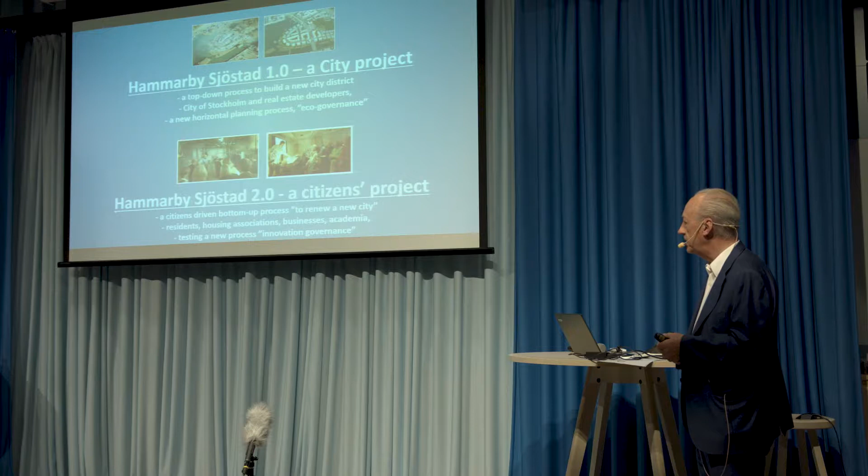Hammarby Sjöstad 2.0 is a citizens project, citizen-driven bottom-up project to renew a new city. Residents, housing associations, businesses, academia, all are on board in this platform. And we are testing a new process, innovation governance.

So here is 1.0 from 1996 to 2016. It was the picture to the left, a rundown industrial area, really brownfield. Then Stockholm tried to get the Olympic Games 2004, and the plan was to have the stadium and the Olympic Village on the place where Hammarby Sjöstad was built. Now, happily, Athens took the games, and we could build a new city, and you have the picture to the right. That led to Stockholm becoming the first green capital in Europe in 2010.

The Economist has branded this one of the world's highest profile examples of sustainable city development. We are pleased to read that, but we understand that there is much more to do.

So this is the backbone of Hammarby Sjöstad 1.0. It's the management of waste, recycling of waste to energy. It's a vacuum-based system, underground, clean, reliable, no landfill. Everything goes down underground, and it goes to produce gas or district heating. This serves as a demo site for city development in China, UK, Norway, Dubai, for example.

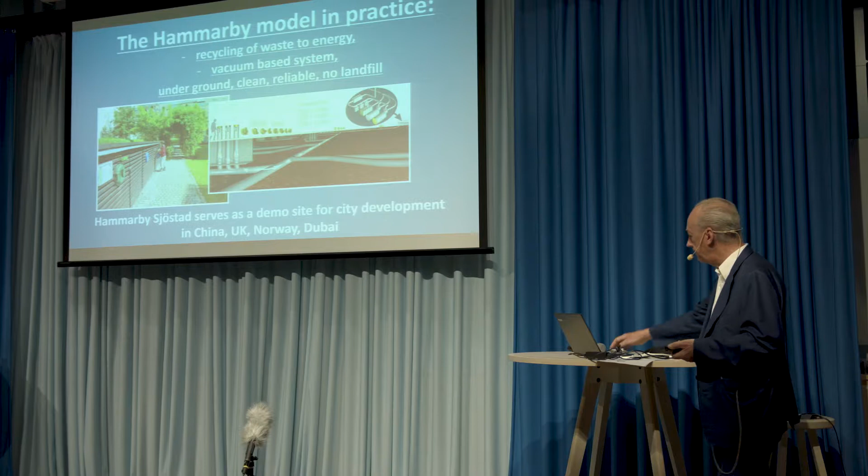On transport, the goal was 80% of commuting between home and workplace should go either by public transport, bicycling, or walking. That is reached. We have a lot of cars, but we are not using them for commuting.

Still under construction, new state-of-the-art buildings as regards energy and climate standards. To the left is a new area, now almost finished. In the middle, under construction, a new office area, and then to the right, a new residential area.

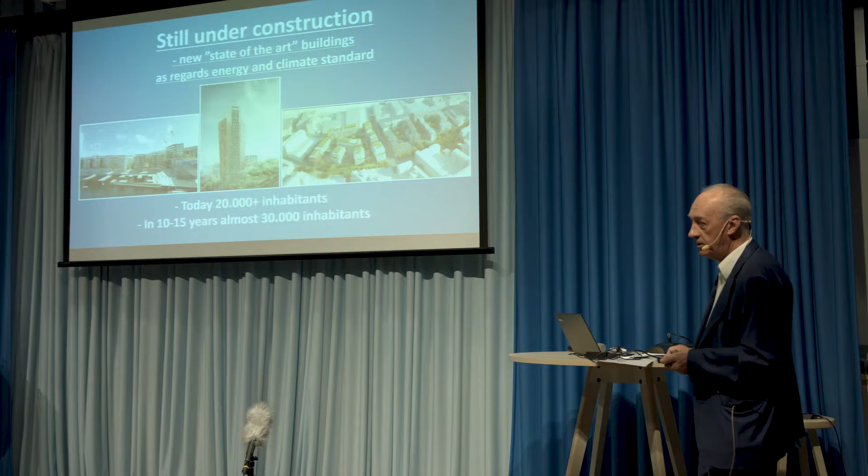Today, we are 20,000 people living here. In 10, 15 years, almost 30,000. Now, all visitors from abroad, not least from China. China are building Hammarby cities, and they are learning very much from that.

And they have one question: what is the secret behind the success? And they think it's technology. We say, no, it's not technology. It's other things. Policy, a high ambition from the beginning, the policy declaration from the mayor of Stockholm: I would like to see a city that is twice as good as anything built before. That was the key to do this.

Second, the planning, a new concept for city development called eco-governance. Instead of splitting up land to each developer, you force the developer to sit around the table together with the city authorities and plan it so that you have an agreed sustainability plan for the city. Not until that is done are you allowed to start splitting land and building on it. So that is the key to it. And we tell the Chinese visitors, if there's anything you should remember from this visit, it's the word eco-governance.

Without that, you don't do it. With that, you can get a lot of things done.

And then management, a new resource management system, to reduce, reuse, and recycle energy, water, and waste. It's called the Hammarby model. It's well known and used internationally.

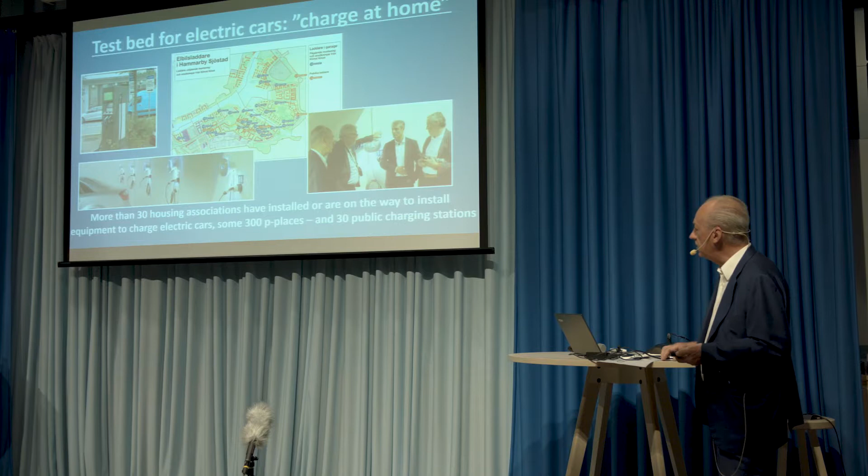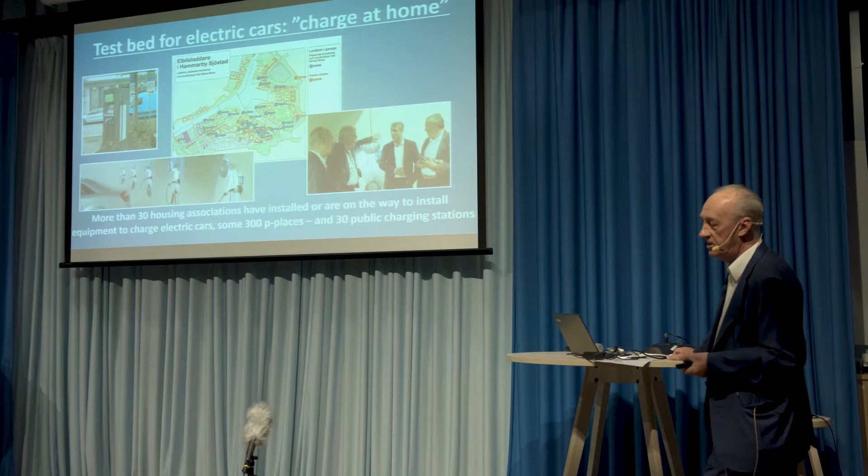So this is one example: test bed for electric cars, charge at home. There are charging stations in the city, in the streets, but that is not the key. The key is that you need to be able to charge your car in the garage at home during nighttime.

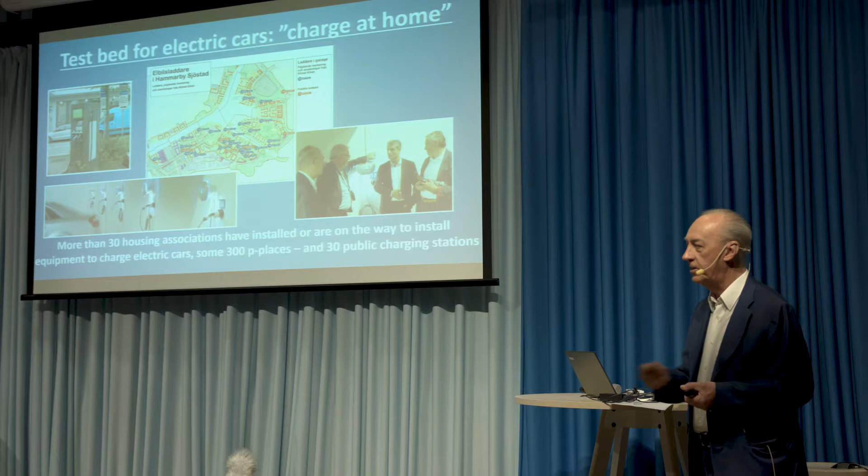Everything is available for a quick transformation of our fleets into electric cars. The cars are available, energy is available, charge equipment is available. But there's one simple thing missing: the charge equipment is not on the wall in front of my car. And as long as there's nothing in that wall for me, I'm reluctant to change to an electric car. But as soon as it's there, I start to think about when and what sort of car.

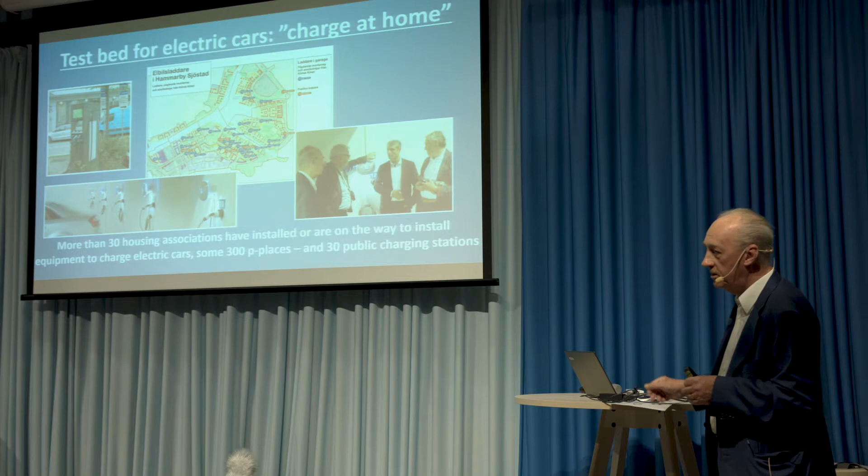And you take the picture to the left down there. This is how it looks in our garage. This is where I have my car, and I'm now discussing with my wife what sort of car we are going to buy instead. The Energy Minister was looking at it.

But the map in the middle, you see the blue marks, that's the housing associations that are already engaged in this and installing it. So we have more than 300 parking places now equipped. There will be 500 by the end of the year, and 1,000 by 2020. And we have reached the critical point of 20%.

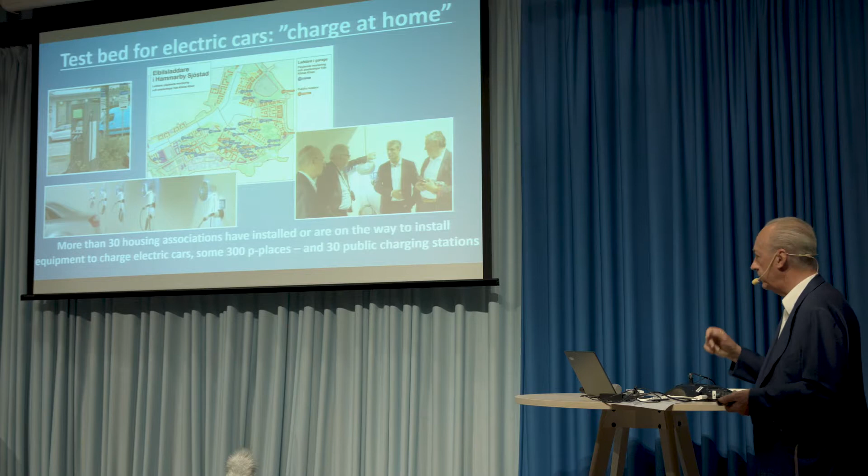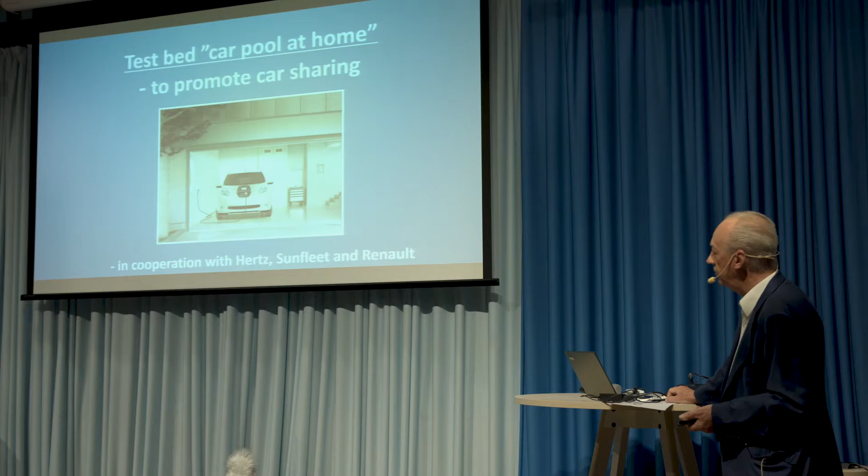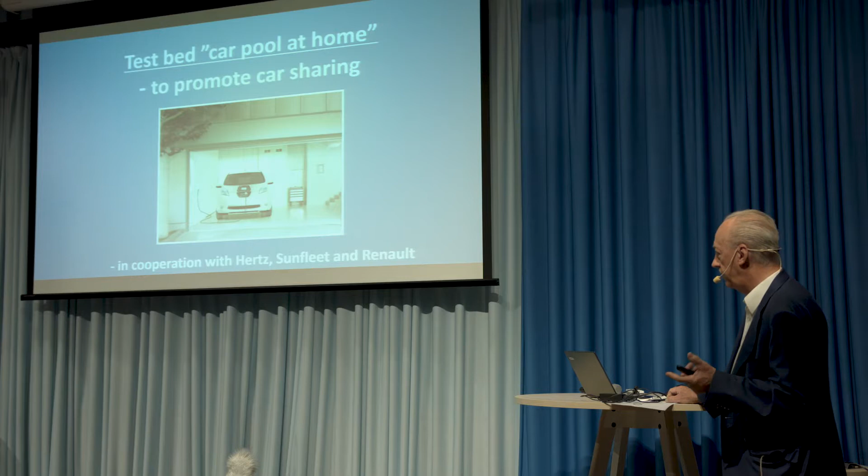So this is a new initiative together with Hertz, Sunfleet, and Renault. That's about carpool at home, electric carpool at home. Instead of finding a car on the street, we have a lot of carpools in our city district, but this is to bring it into the garage. So I take the elevator down, I find the car, I share that with 2 or 3 other families. And that will reduce cost for using the car, and will speed up the introduction of electric cars.

Here's another: we have a coordinated procurement of transport for recycling and other real estate services. We go together, about 50 housing associations working together, doing this procurement together. We can save money, and we also set the condition that you have to use electric cars instead of traditional cars. So these big cars to the right will be replaced by new ones, and we know now that both Scania and Volvo are on the market with it, and we are trying to get that in.

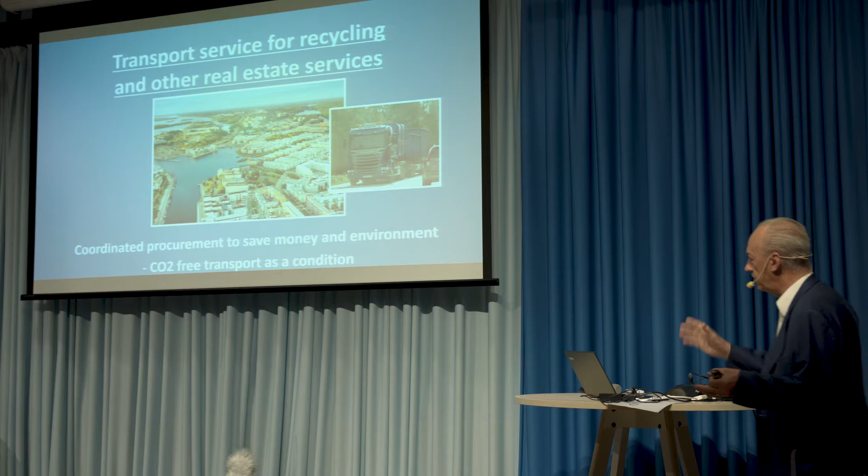So CO2-free transport as a condition. We are working with Taxi Stockholm, and there is a zero zone taxi program, so when you register on zero zone and you phone for a taxi, the call goes out to the electric cars first. That gives an advantage to those taxi drivers with electric cars. And we are supporting that so that they can reach the goal for 2025, when all taxi cars will be electric.

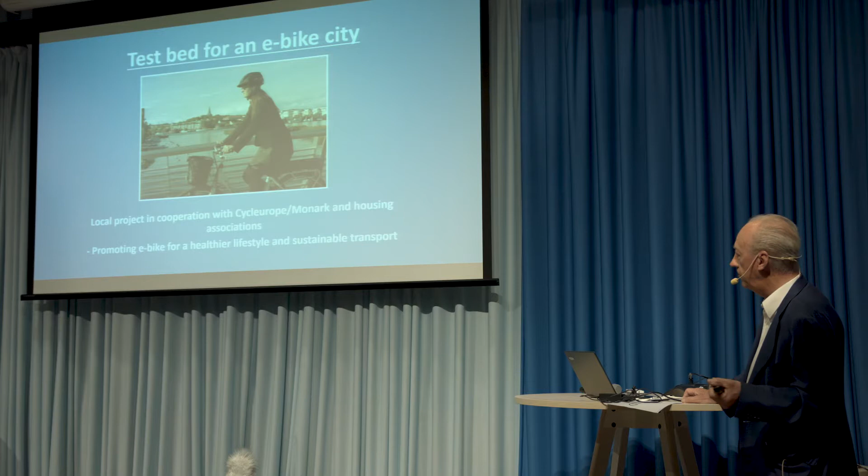We test bed for e-bike city, and we are working with housing associations to introduce electric bicycles to go from cars and from public transport into something that is a healthier lifestyle and sustainable transport.

We are working with leading companies in Sweden, including Vattenfall, on Bus Plan Stockholm, a test bed for electrification of inner city buses. We started with a demo line, and we are now pushing for a complete change from traditional buses into electric buses. We have Volvo, Scania, Vattenfall, ABB, Siemens, Ericsson, and others on board. The Stockholm region is a bit slow on this, but we hope we'll take a decision next year.

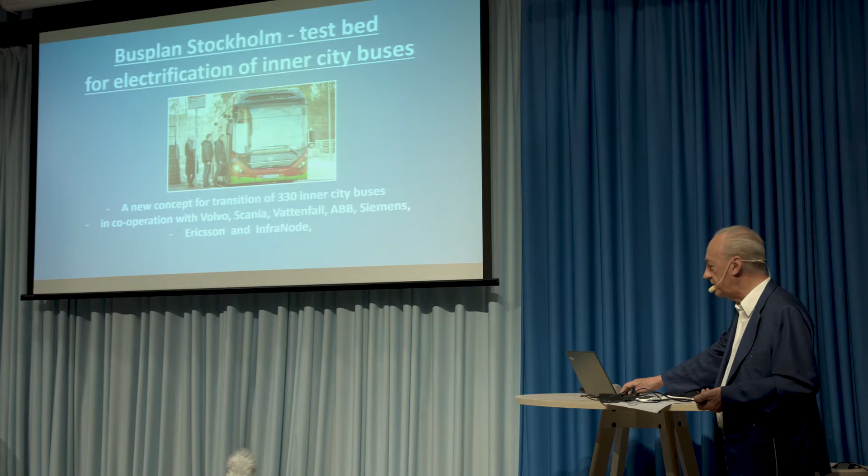Now we are also working on transport—that was about charging at home. This is about the use of energy in our buildings, so we call it energy at home.

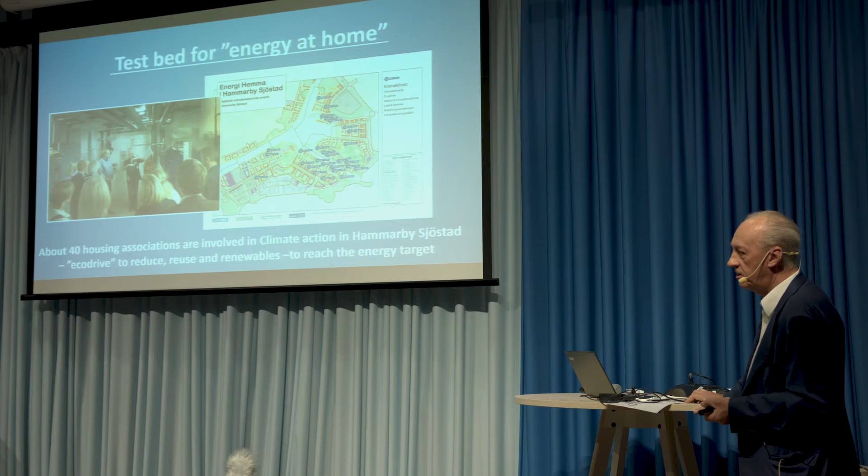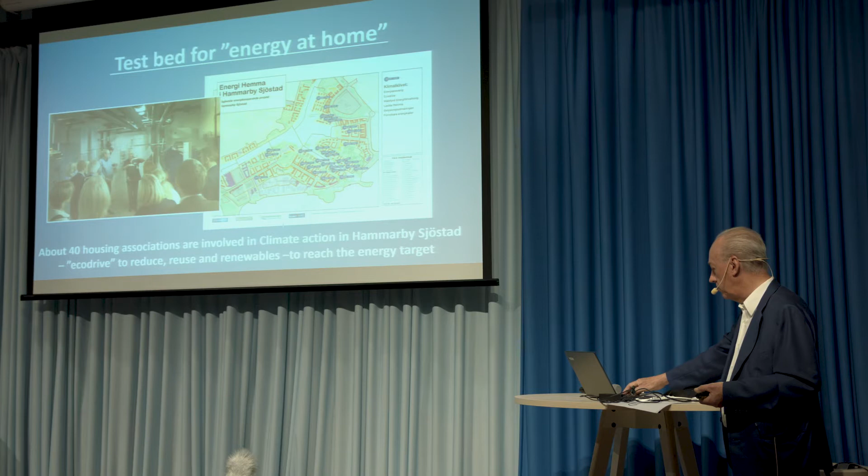We have about 40 housing associations involved in climate action in Hammarby Sjöstad. We do eco-drive, which is going through the whole building together with an expert to find out where the weaknesses are and how we can improve it, to reduce, reuse, and use renewables. That is to reach the energy target and bring down the high use of energy in some of the buildings.

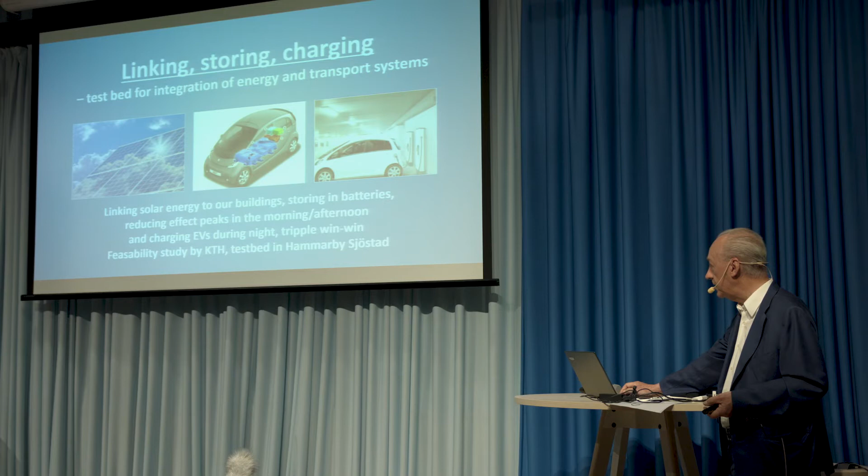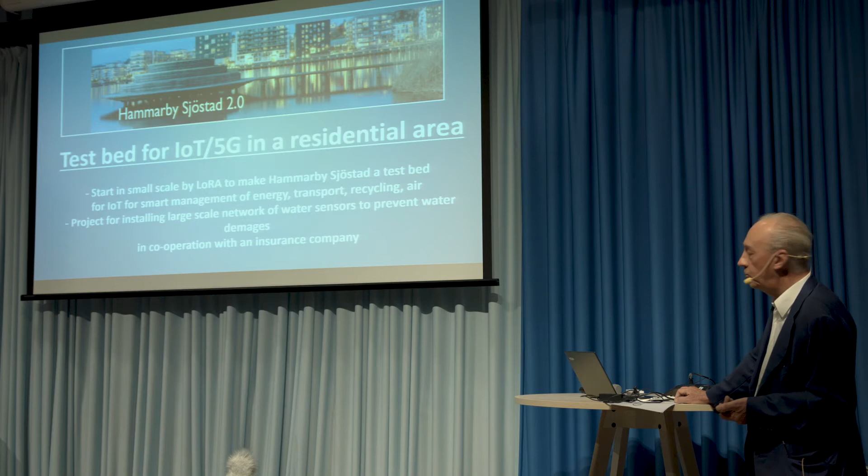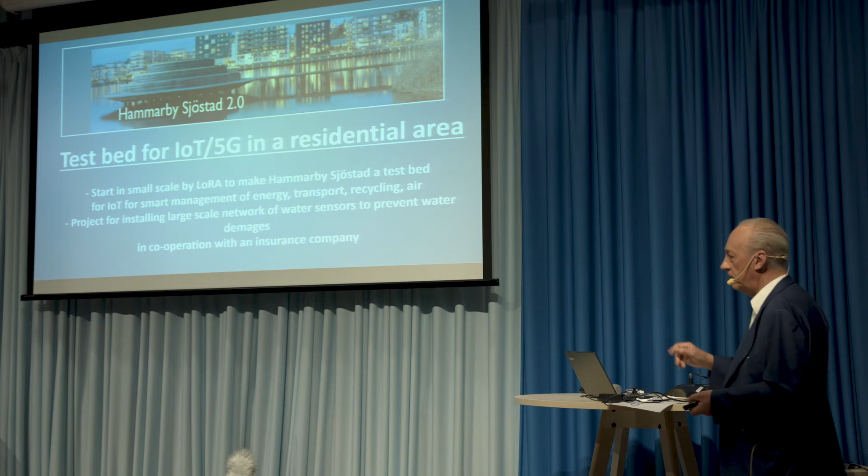We are working as a test bed for Internet of Things and 5G, and we have some new initiatives. One is a project installing large-scale networks of water sensors to prevent water damage in cooperation with an insurance company. This is the biggest cost for insurance companies in housing—rebuilding the whole kitchen when you have damage—so this is a way to have zero tolerance on that. We are part of a national research project on sharing.

This project covers Stockholm, Gothenburg, Malmö, and Umeå. We are working on it for 3 years, mainly to develop digital platforms for sharing companies.

And here's what I talked about before: we are going to introduce higher levels of digital systems in the recycling system together with Envac.

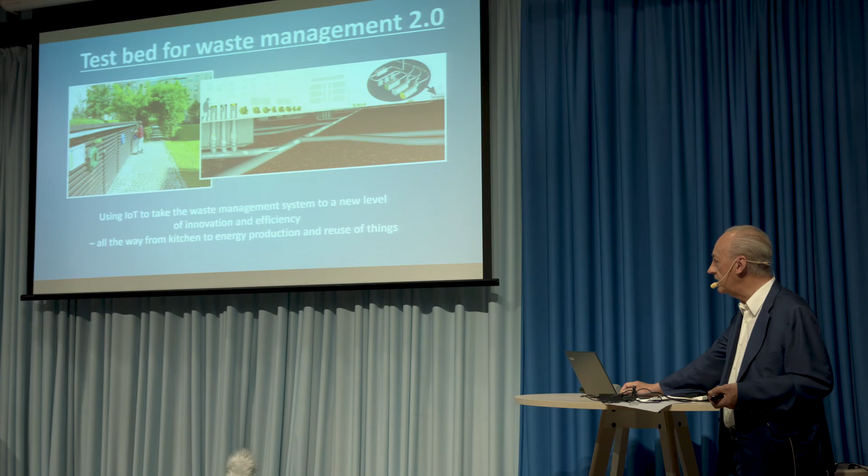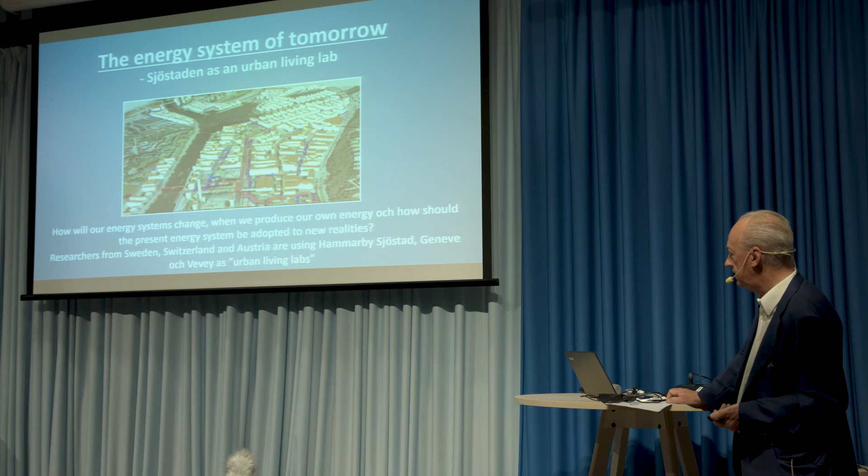Here's another system, the energy system of tomorrow. This is a KTH European project, and the question is how will the energy system change when we start to produce more energy of our own. Hammarby Sjöstad is one test bed; the other two are in Geneva and Vevey in Switzerland. So we are serving as an urban living lab there.